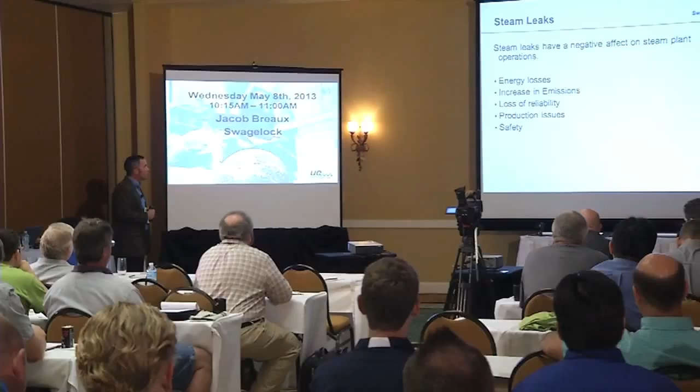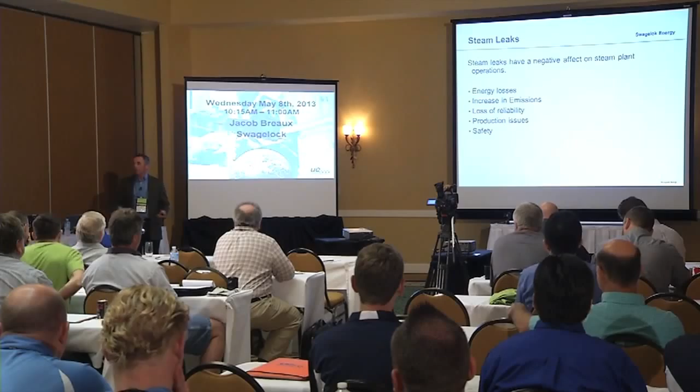They have a negative effect on the steam plant: energy losses, which is pretty obvious right? Steam is not free, you have to do something to create it. If you lose it, you're losing money. Increased emissions, you're having to use the boilers more, possibly even run another boiler. Loss of reliability, production issues. Leaks are a form of flow, pressure drop. You're losing pressure, you're losing temperature. So if you have tracing systems and you're losing temperature, that may be causing you production problems. And then obviously it's a safety issue, not only because it's hot and it can burn you, but during the wintertime it'll cause freezing problems.

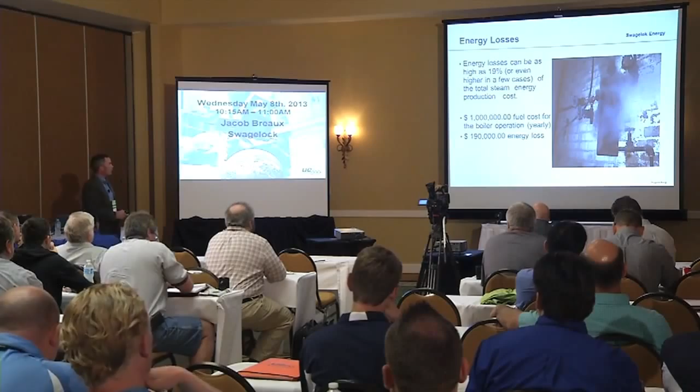The losses can be as high as 19%. So let's say, for instance, you've got a $1 million fuel budget, that's $190,000 potentially, and every plant's different. I want to make that clear from the start—I'm not giving you a fact about any plant, I'm giving you rough ideas of what we've seen throughout our work. You could be losing $190,000 just through leaks of various sorts. Leak correction has the biggest payback.

We get asked a lot of times to come into plants, do audits for various reasons, whether it be production issues, energy issues, water hammer issues, you name it. And we're always looking at potential payback and return on investment. So a lot of times we're looking at obvious things like insulation, possibly a high-pressure condensate return system, to improve thermal efficiency.

But without a doubt, leak correction has one of the greatest paybacks. A lot of time is spent, and to good measure, replacing steam traps, testing them. But if a steam trap fails and you have the proper condensate return system, you're losing the latent energy. You're not losing the total energy if you're recovering it. So although it may not get the attention that a lot of the other aspects of steam systems get, leaks themselves can save a whole lot of money, just as much, if not more, than some of these things.

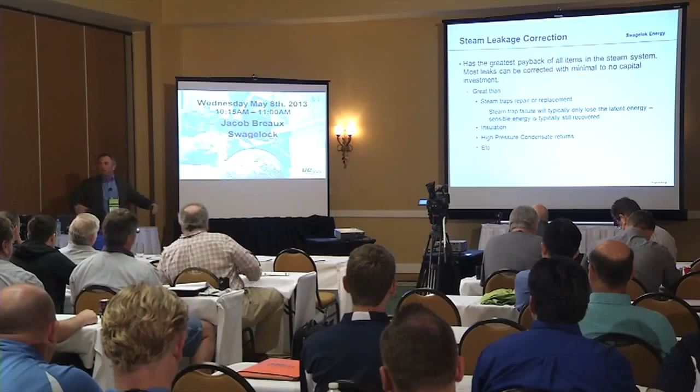We'll spend a lot of time on boiler operations and whatnot. But I'll tell you, you go out there and you're working on things, a high-pressure deaerator, whatever the case may be, and there's leaks everywhere, and you just wonder to question yourself, hey, this is obvious. Fix them.

We get into this because we do both. We work with steam, we work with compressed air. Kelly Paffel, who's the technical manager for SEA and my mentor and who I work with quite a bit—today he's actually beginning an audit, and I just learned from Adrian it was a compressed air audit. I thought it was steam. Nevertheless, a lot of interest gets paid to both of these.

Now, I'll say this—again, I'm from South Louisiana. I live in the heart of sugarcane country. There are 8 major sugarcane mills where I live. Their byproduct from sugarcane is bagasse. Their boilers burn bagasse, it's essentially free. So if someone from a sugar mill is sitting here today, they're going to argue this point and say, no, we're not paying $10 per 1,000 pounds. Our compressed air is actually costing more. Great, fine, whatever—it's still costing you money. It's a leak.

But in this case, the point we're making is that oftentimes we spend a lot of time on compressed air, not realizing the cost for steam. Right now, with today's natural gas prices, $10 per 1,000 pounds is probably a little high—it would definitely take into account loaded costs, fuel costs, boiler efficiencies, and all the water and chemicals and whatnot. But for the sake of discussion, we'll go with $10 per 1,000 pounds, 100 PSI. You're looking at about a $1,500 difference over the course of a year at the same pressure with the same leak.

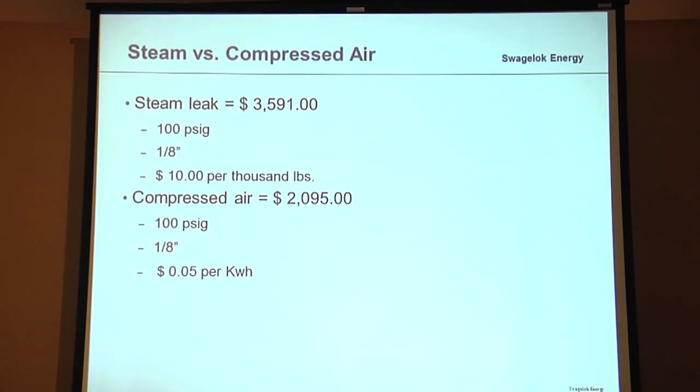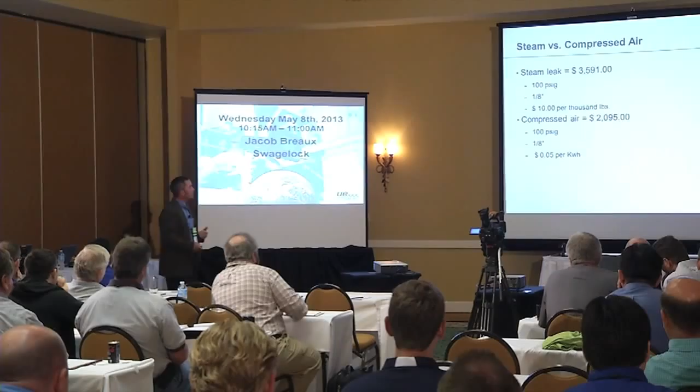And truthfully, in our business, most of our work is with steam. We do compressed air, but most of the work is with steam. So the question becomes, okay, we know it's not wanted, we know a leak is an undesired flow path—how much are we losing? How much is going through this leak?

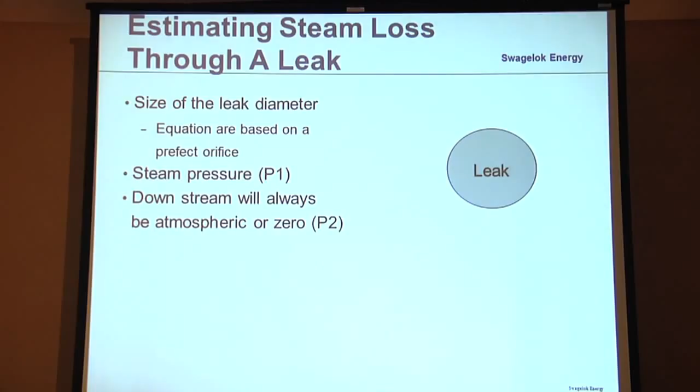Well, it depends on the size—here's the leak, so it's 1/8 of an inch, 3/16, 1/4 of an inch, whatever the case may be—and it's the steam pressure. The downstream pressure is always atmospheric, obviously, since it's leaking to atmosphere. So a leak calculation is no different than any other fluid flow calculation—it's due to pressure drop and orifice. The only constant in this case is that it's always atmospheric pressure.

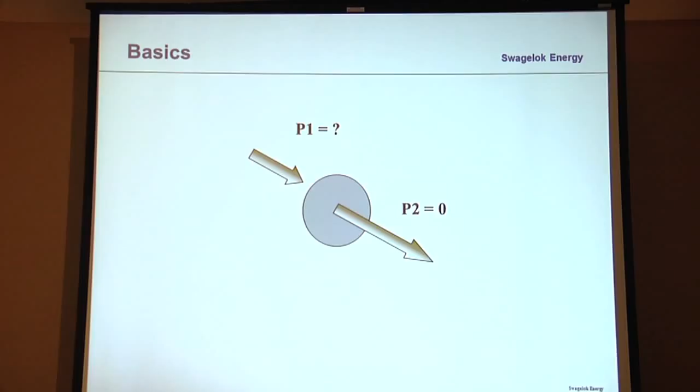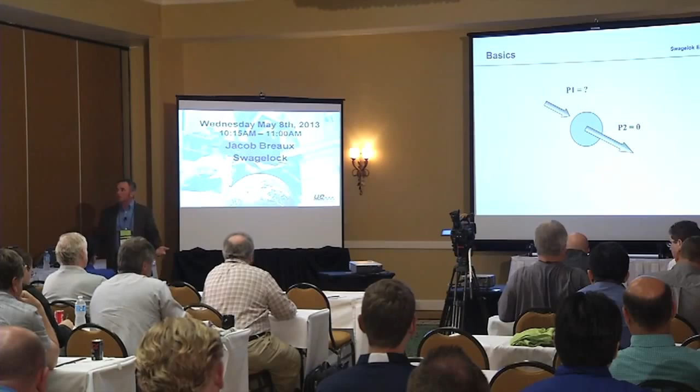So here's the basics: P1, P2. 50 pounds to 0, 150 pounds to 0. Which one's going to have the higher leak rate—150 to 0 or 50 to 0? 150 to 0. So a lot of these things I'm telling you are pretty elementary, but you fix the high pressure leaks first—that's where you're losing the most steam, that's where you're losing the most energy.

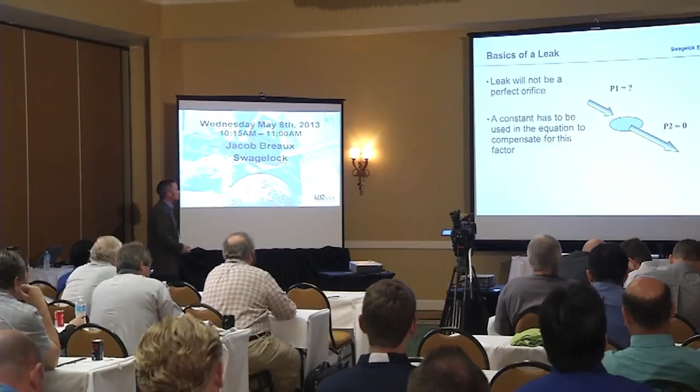However, if it was that easy, it'd be done probably more often. But a leak is not perfect—a leak is leaking around the threads of a connection.

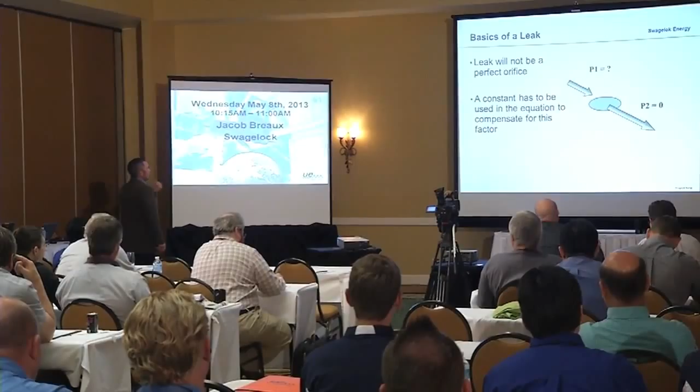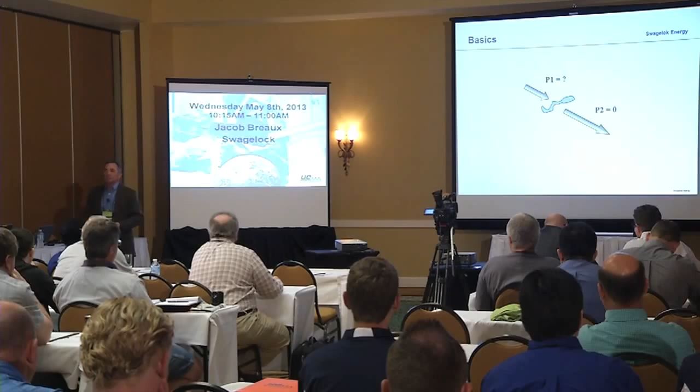A leak can come through the packing of a valve, or at a flange point. It's not a perfect circle you can run a perfect calculation on. So in order to try and understand it and better quantify the leak, a couple of constants have been developed, because leak points are going to be jagged, like a crack in a line. It's not going to be a perfectly symmetrical orifice.

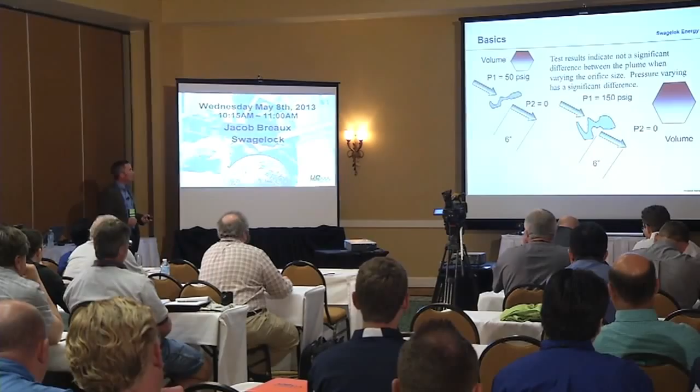Now, a lot of times we get into discussion about plumes and how long the plume is, and it'll tell you the length. Well, here's what I'd like to say: test results indicate there's not a significant difference in the plume when varying the orifice. However, varying the pressure has a significant difference.

So here you've got a smaller leak. This is just a representation of the orifice versus potential total volume. At 50 pounds to a zero orifice, the example I just gave you, maybe a 6 inch plume. And when I say 6 inches, I'm talking about to the end of where you can see any kind of velocity, and then the wind just starts wisping it away.

Well, you can have 150 pounds, but if you've got a larger orifice — and believe me, it's not that easy to look at because it looks like fog. A lot of times you feel like you're the opening band at a rock concert, because you're coming through this smoke screen when you're trying to look at this stuff. But the fact is, you don't know.

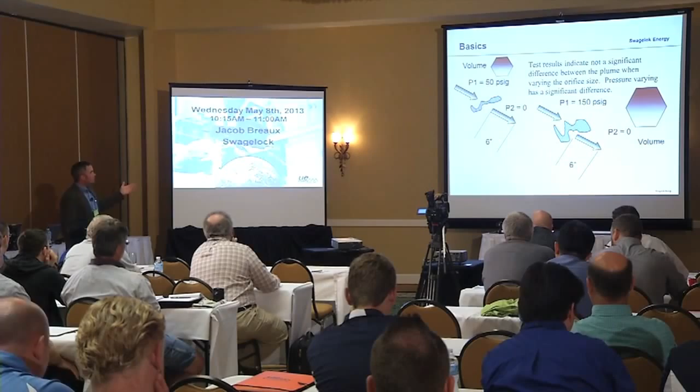So if the plume's 6 inches — let's say you can see some velocity coming out, and in order to have velocity you have to have pressure, so that's what's driving this. But it's 6 inches, and this one also looks to be 6 inches, and these are rough estimates. Well, you have no idea if it's the same volume just by looking at the plume. It's highly dependent on pressure, that's what I was just saying.

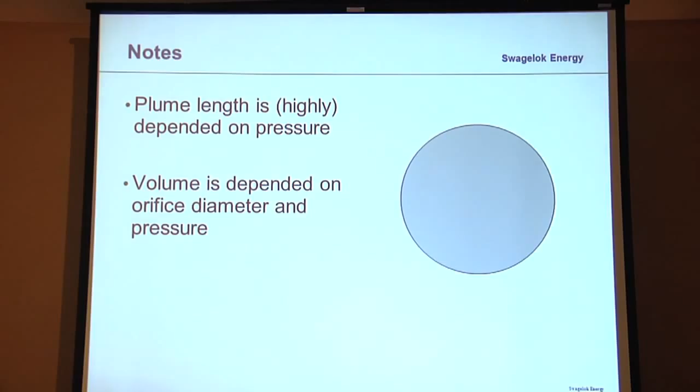The volume, however, is dependent upon the orifice. The actual loss is going to be dependent on how big it is. That only makes sense, right?

So if we look at this: at 250 pounds through a 1/8 inch leak, this carries through our $10 per 1,000 pounds that we established earlier — almost $8,300 a year on a 250 pound leak at 1/8 of an inch, and that's estimated. However, you go up 3 times in the leak size, you go up nearly 9 times in the cost.

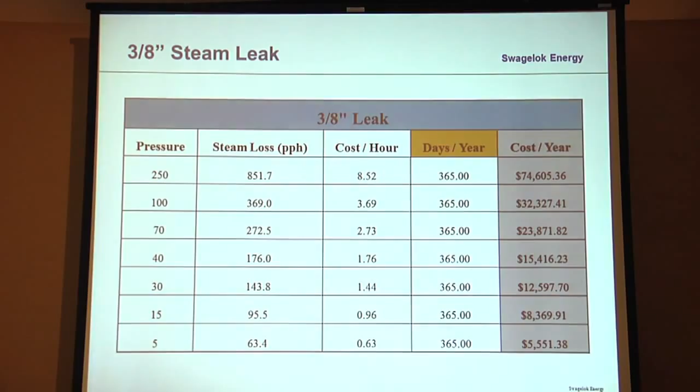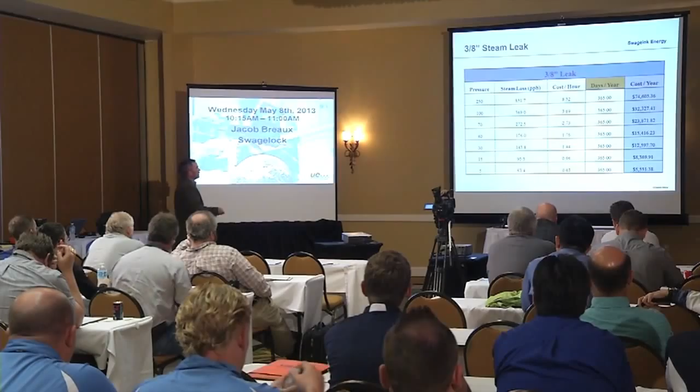We'll see soon why that is, and you probably already know — in any flow calculation, the diameter is squared. So when you start increasing that diameter, being a squared function, your cost per year and your actual volume go up 9 times, as in the case here. Going back and looking through it, it stays the same for most of these — same pressure, but 9 times the cost because of that leak size.

So what is the equation? It's a variation of Napier's equation. There are different variations, and this 22.88 is simply a constant that's been derived and accepted that we use — I've also seen this number as 23 or 23.5. The fact of the matter is, this is simply an estimate, a best guess, arrived at through testing.

This is the point I was making: the diameter is squared. Fix the big ones — that's what's costing you. It's pretty obvious, it's right there. It's math, it's not magic.

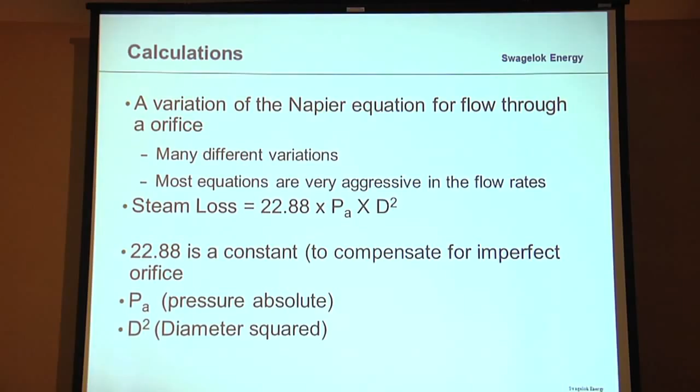So looking at a couple of examples, here we've got a distance — this is what I'm talking about when I say the plume length, 6 inches. You've got a 3/4 inch valve, maybe a third of the way open, so we're estimating now a 1/4 inch leak at a pressure of about 140 psi.

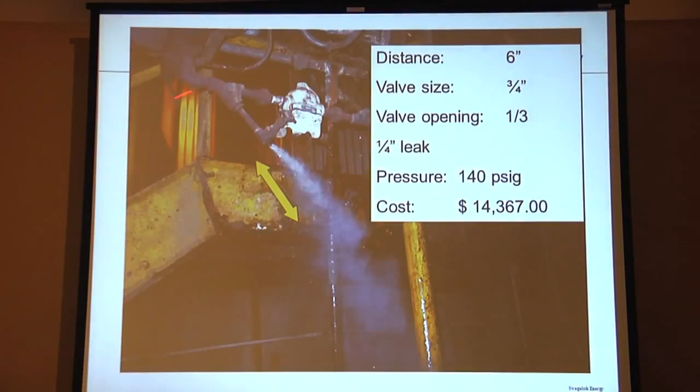What I want you to see in this picture is the valve's not leaking, the valve's open. Why is it open? More than likely they're having problems at the steam trap, so they're not getting condensate through, so they're opening this to drain the condensate so they can maintain temperature.

A lot of leaks - I see one guy shaking his head, I've hit with that before. How often? I need to start selling hoses, because most of the time there's a hose from here to the nearest drain. That's the reality - that's another subject, that's part of our STEAM classes.

But just to talk about it a little, what I hope you get from this is when you walk by this, put a number to it: $15,000. So not only are you losing energy, you're creating a safety hazard, you're having to produce more steam. Everything I said at the beginning of the presentation holds true in this one simple application.

Any questions or comments - I don't want this to be death by PowerPoint. Please stop me at any point and ask a question, I don't mind at all. And if I get off a little on other subjects of STEAM, just get me back in line, but I like to tell you a little as I go, because I see it all the time.

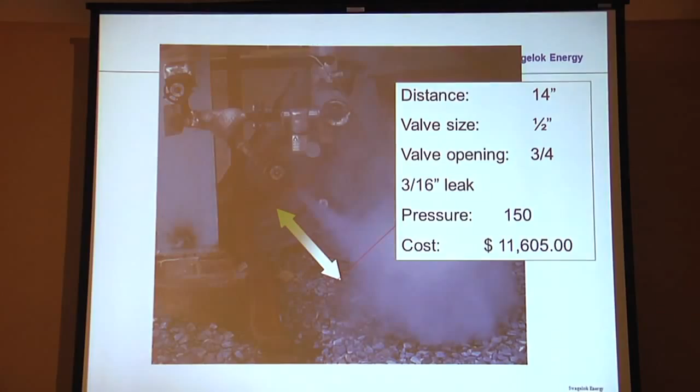Again here, I know I should have put some on the same screen, but with a 1/4 inch leak, 3/16 - now we've dropped down a little bit. We've actually increased the pressure, but again because of that diameter being a little smaller, just understanding costs - this, you've got 250 pounds, same leakage, same leak estimate.

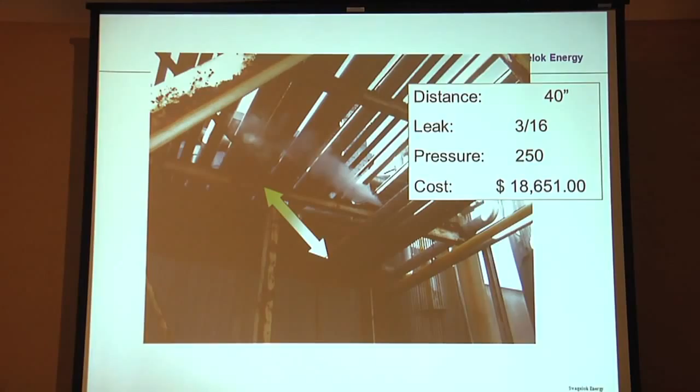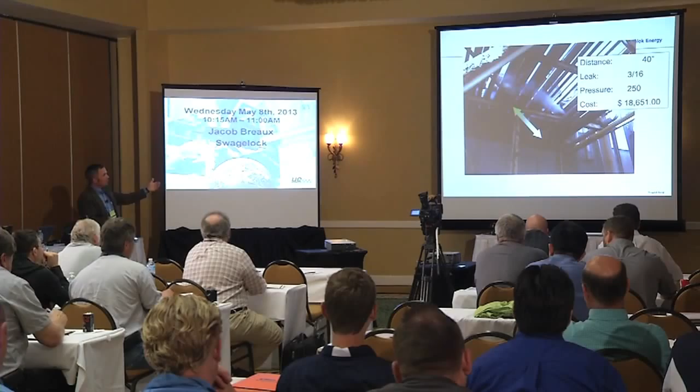Now, these are all estimates, and that's what I'm getting back to - your cost is going to go up. Higher pressure, same diameter, you go up 100 pounds, you're increasing your cost by almost $7,000 a year from a leak standpoint. Now here's a question for you.

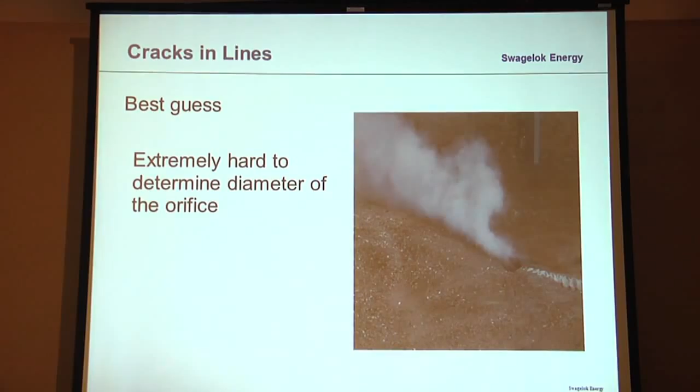So we've got the equations, we understand the equations, we can do it. We walk by and we see this. Now, anyone want to take a guess what that leak rate is? You have no idea - it's on the ground. There's no way you can quantify this.

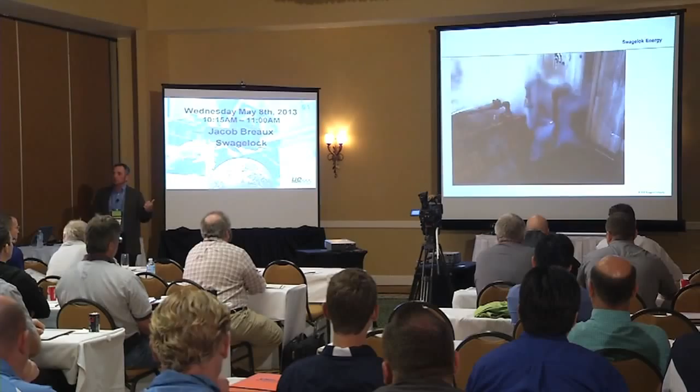What do you think the plume length is here? Any idea? The hose is here.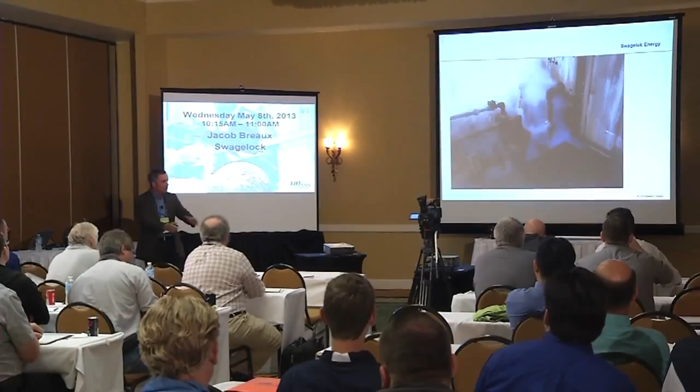I want to go back to this one and stop it here for a second - I'll touch on a lot of these things throughout the presentation. But one of the things we're big on, especially with condensate systems, off of drip pockets, off of small loads - you can't do this off of process heat exchangers, but we typically tend to stay and use more tubing, tube fittings, stainless steel.

Why is that? Because when people are designing condensate systems, they'll use Schedule 80 piping. You know why? It buys them a little more time before the carbonic acid eats through it. It's not for pressure, it's for a little more longevity in that piping system. And then what do they do? They thread it. And guess what happens when you start up and shut down steam systems and condensate systems - they expand and contract. And where is the expansion and contraction going to take place? At the threads, which is now the weakest point.

So you've bought a big old thick pipe, but then you've threaded it, and you've made it where you've left no room for expansion in a system that is going to start up, shut down, and expand and contract. Guess where your leaks are going to be? At the threads.

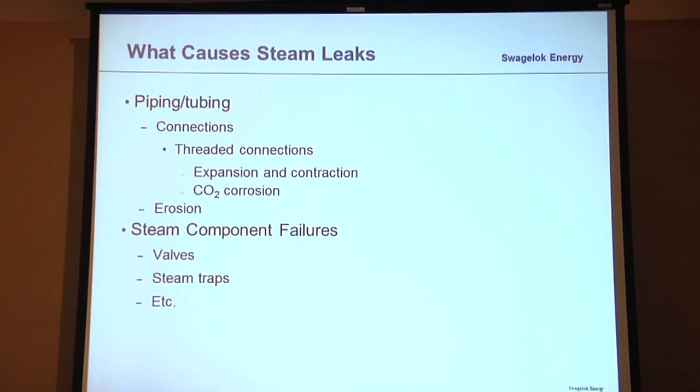These are just more and more videos, but I want to get to some of the presentation here. So, connections - I just talked about that. Expansion and contraction, erosion, valves - you know, this is classic. So people buy valves that leak. Did you know that? How many buy valves that leak?

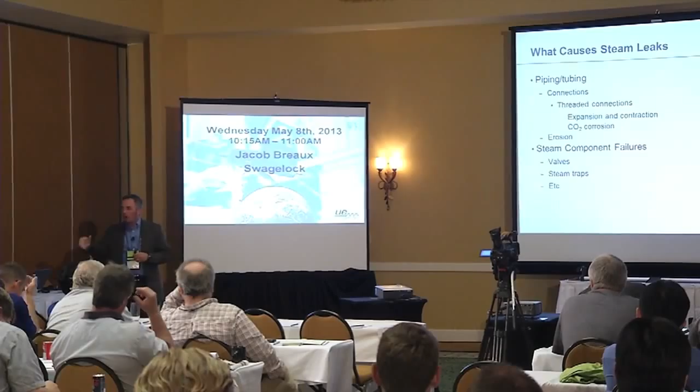Come on, here's the deal. When you woke up this morning and brushed your teeth, you were operating a higher shut-off class valve than most people buy for steam systems.

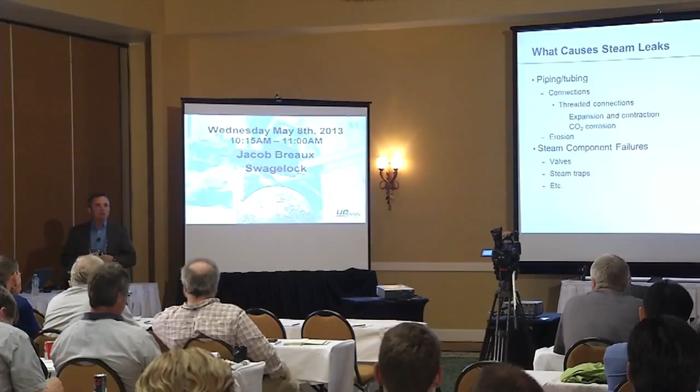If you're buying less than a class 4 shut-off, it's going to leak. You install it, it leaks. So what happens? You get somebody out there with a 36-inch pipe wrench and a 4-foot piece of conduit, known as a cheater, and you get on it and mash it, metal to metal. The best you can hope for is that it starts leaking. The worst thing that can happen is you break the bonnet and you've got a nanosecond to get out of there. It's done all the time.

There's higher quality valves in hotel bathrooms than there are in steam systems. Yet we wonder why we sit through presentations about leakage. It's right there in front of you. There are quality valves. Do they cost more? Absolutely, no doubt, up front. But longer term, if you believe some of these numbers and look at these leak rates and the potential savings, I'd argue it's a better payoff.

Steam traps. Now I have to be careful, there may be steam trap people in here, but I'd say no matter who makes the steam trap, no matter what design - float and thermostatic, mechanical, thermodynamic - they leak. Why? Because one of the functions of steam traps is venting air, very poorly I might add, but they vent air at startup. Well, in order for them to vent air, they have to lose a little bit of steam. That's a fact.

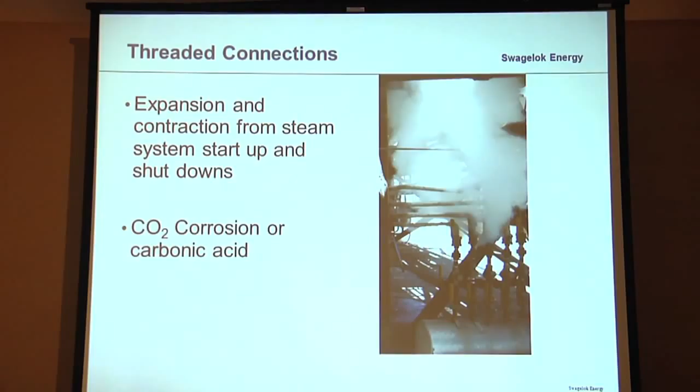Expansion and contraction from steam, carbonic acid - why is this a big deal? Everyone runs steam systems. I don't know of a case where you've got deaerators that do a perfect job. They do a pretty good job of venting non-condensables, but it's not perfect. Things condense, CO2 forms carbonic acid, and it will eat away at carbon steel.

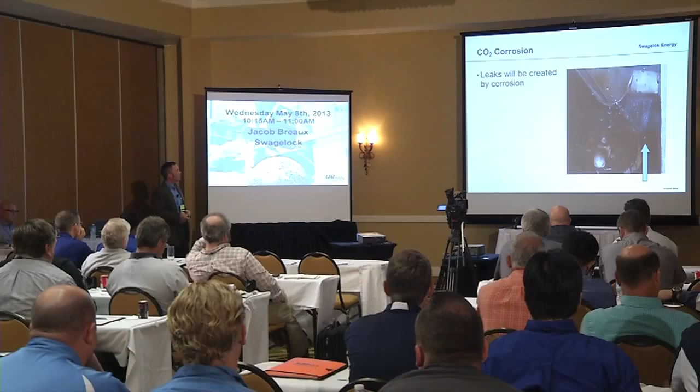Going back to the condensate systems and why we're a proponent - I think there's some inherent benefits to using stainless steel over carbon steel for condensate systems. And leaks will be created there. Here's the deal: a small leak today, a bigger leak tomorrow.

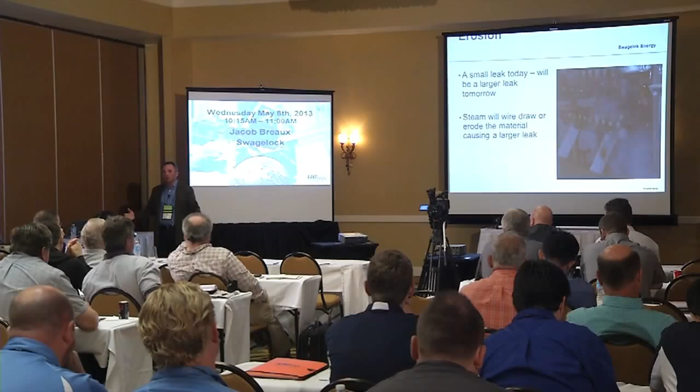The valve I just told you about - so now you mashed it, it's closed, you did your job. Now you've got to open it. A lot of times people open valves without warm-up valves, so they're taking a valve that big and trying to just barely open it. Well guess what? When it barely opens and you create that pressure drop, it'll cut it like that.

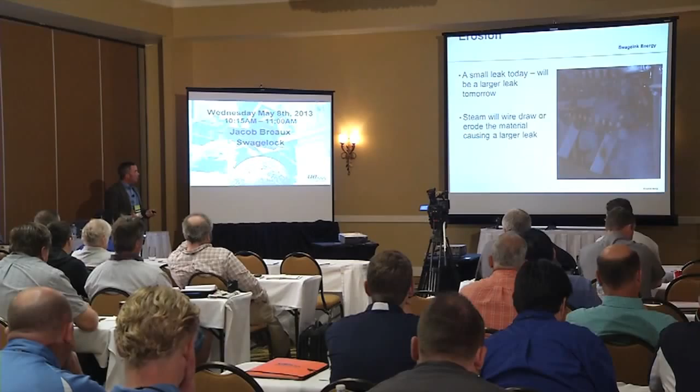It'll wire draw over time, and your small leak, your 1/8 of an inch, becomes 3/16, becomes a quarter, and now it's really costing you a lot of money.

Let's talk a little bit about emissions. If you're losing this steam and you need this steam, you're having to make up for it. We all know about emissions, we all know about the emphasis on it right now. This is fossil fuel emissions, pounds per billion BTU of energy input.

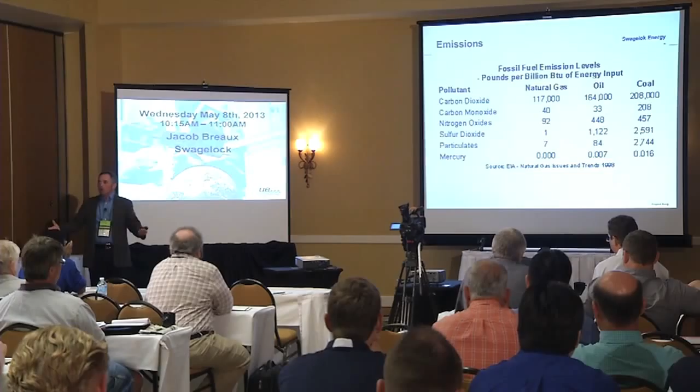As I said earlier, there are multiple fuels being used for steam production within boilers - I've just put a couple of them up here. But these are the type of numbers that matter. Hey, you've got 2 boilers running, let's say one at 60, one at 40, whatever it is to maintain it. Is there a potential to turn one off? And man, nobody likes that. Well, why do you have 2 boilers running? One can do it. Well, just in case.

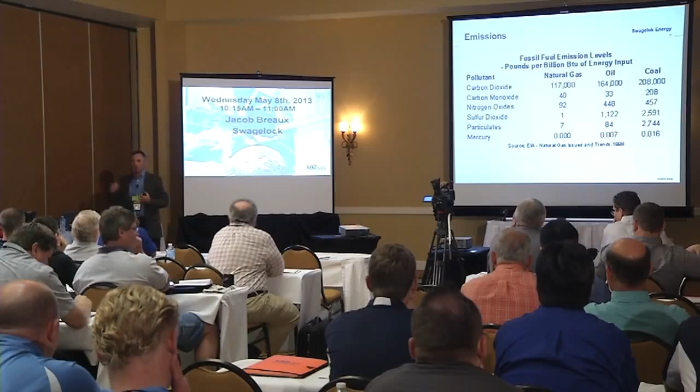Just in case. So you're running it at less than 40% firing rate, which means the excess air is great but the efficiencies are horrible. You're costing yourselves emissions, and you're producing steam you really don't need, but don't worry about it because you're leaking, so you're losing it. So when I fly back to New Orleans tonight, how many cars do I have in the parking lot? One. I don't have another car just in case. I mean, really.

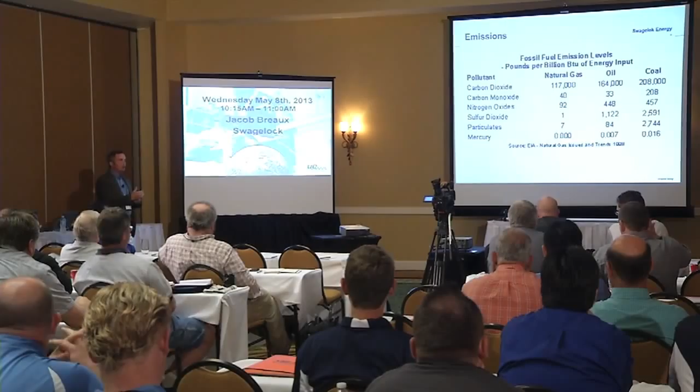So the point is, do the maintenance, do the PMs, have a boiler management system, try to look at ways to reduce leaks. I guess my point is, and I learned this from Kelly, his favorite word is: don't componentize. People love to componentize systems.

Oh, it's a steam trap. Well, no, it's not a steam trap. You're trying to elevate condensate 30 feet, and you're losing differential across the trap. It's backing up condensate into the heat exchanger, and that's what's causing the water hammer. Anyone ever tell you their trap handles water hammer better than anyone else's? Just see them out, wish them a good day, that's a ridiculous statement. Water hammer kills people. It's not the trap's problem, it's a piping problem. The picture I showed you with the leak, it's probably not the trap's fault, it's probably a piping problem.

Then this is my favorite. They come out the steam trap, and as soon as they come out, they reduce the piping size. Why would you do that? Condensate is 2-phase. They size condensate lines based on liquids, but condensate is a 2-phase flow. So as soon as that condensate comes out and sees a pressure differential, a percentage of it is going to change state and re-vaporize. It's going to expand, but yet people reduce the pipe.

These are just tidbits of things that you need to be aware of and look at and think about, why are we doing this? Okay, back to leaks.

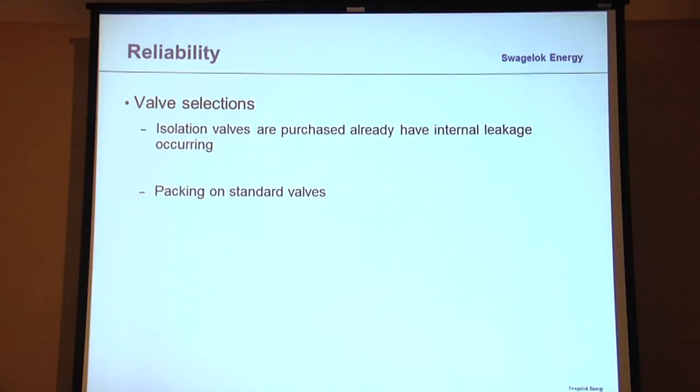Valve selections, I've already kind of touched on this. Isolation valves as purchased already have an internal leak rate. Someone can tell you, my valve doesn't have to meet a leak rate. They are 100% absolutely correct. If it's a class 1 valve, you don't have to meet it. It's up to us as consumers, engineers and project managers to specify a valve with a leak rate.

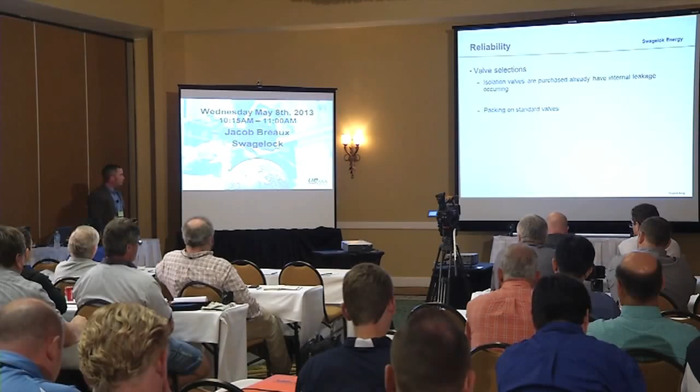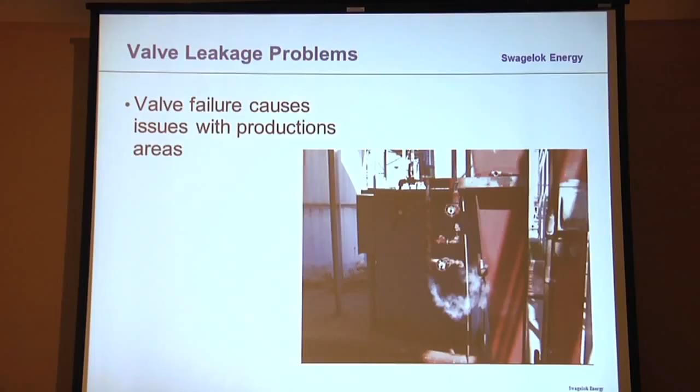Why am I showing you this picture? I don't know why I don't want to. I apologize, I wanted it to stop on that picture.

A lot of times we'll start talking about steam quality. People ask us about steam quality, and there's a lot of different ways you can test steam quality - laboratory type tests to get official. But a good rule of thumb is, open a valve, and steam is invisible. Steam is not that white puffy cloud that you see - steam is an invisible gas. So when you open a valve, if you've got good steam quality, there should be about 2 inches that you see nothing. It's absolutely invisible.

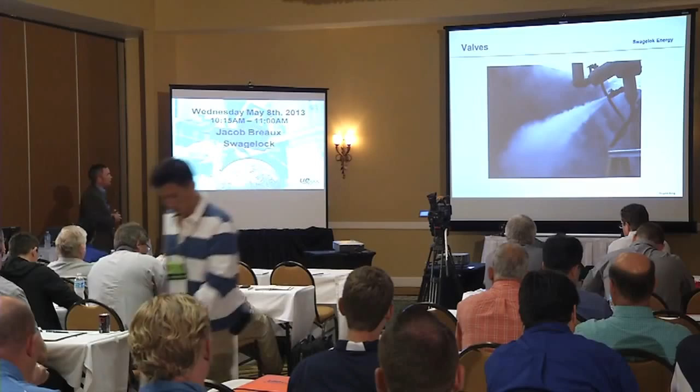So my question to you, what do you think of that steam quality? Very poor. But the reason I bring this picture up is because during an audit, during a needs assessment within a facility, we'll be walking around and we've been told, hey, we've got poor steam quality, yada yada. So we'll ask someone, can we open a valve? Well, that requires a work order, it takes a while, but the point of the story is they don't want to do it. And we're like, well, we want to just get a look at it. Why? Because they're afraid once they open it, when they close it, it's still going to look the same exact way.

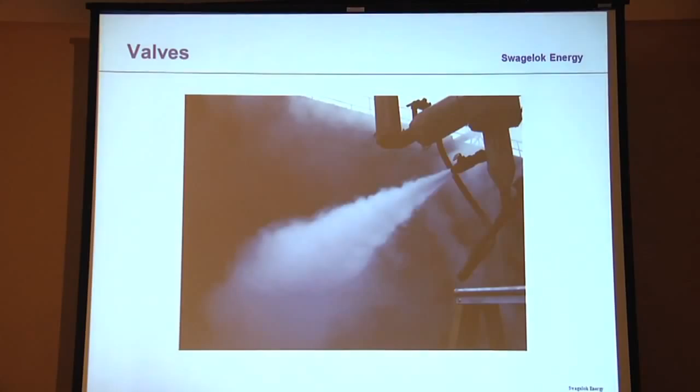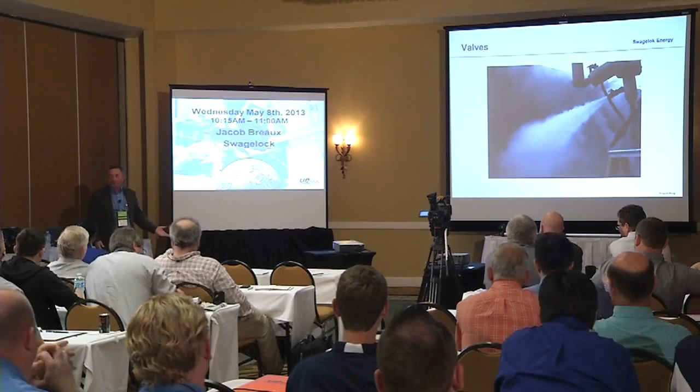Just what you see. I mean, this is real life, this is what happened. They're hesitant to open a valve, not knowing that when they close it, it's going to shut off.

This is what I was talking about earlier. So if you remember back to my opening slide, I talked about energy losses, I talked about emissions, I talked about production issues, I talked about safety issues. And one of the things here with production, it'll lower pressures.

Steam tables - for a given pressure, there's a given temperature. 100 psi steam is 339 degrees. 99 psi steam is something less than 339 degrees. So if you have a system that is designed for a given temperature, i.e. pressure, and you no longer have that pressure because you can't maintain it due to leaks, then you no longer have the temperature that system was designed to. So when I talk about production issues, that's what I'm talking about - a drop in pressure is a drop in temperature.

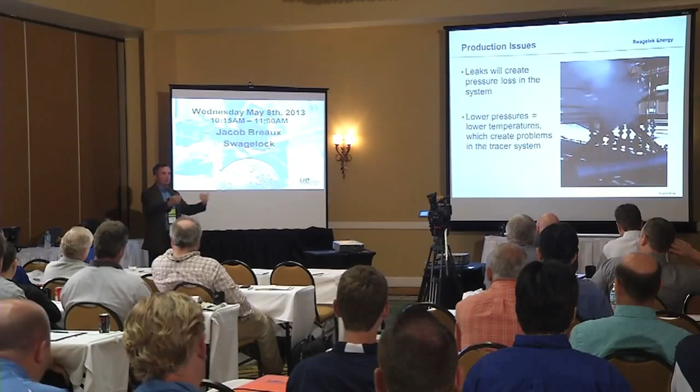If a process needed a certain temperature, you no longer have that. And then safety - these are pretty obvious.

Personnel injury, burns. Fortunately, I haven't been involved in an incident investigation myself. Some of our other engineers have, but I have been involved in training for folks who had an incident, and part of the follow-up was they needed training. So we did the training, and I'll tell you, it's not very fun, and it is very, very real.

So burns are obvious. Fog conditions - if you think back to that video I showed you with the two big steam traps and there was just a fog everywhere, that's dangerous. I've been in situations where I couldn't see someone from me to the table because of the fog coming up. Those are dangerous situations.

And this is the deal - Kelly said this first, and it's so true. If I go into a plant and I have to get on a ladder higher than 6 feet, I need a harness, I need to go through training, I need to do all these things, but yet I can walk by and they got 100 psi steam leaking, blowing out the pipe. For me, it's hard to fathom. I'd rather take my chances on a ladder than walking by 100 psi steam blowing out. It's up to you, it's your choice, but I know what I would rather do. I'm much more comfortable on a ladder.

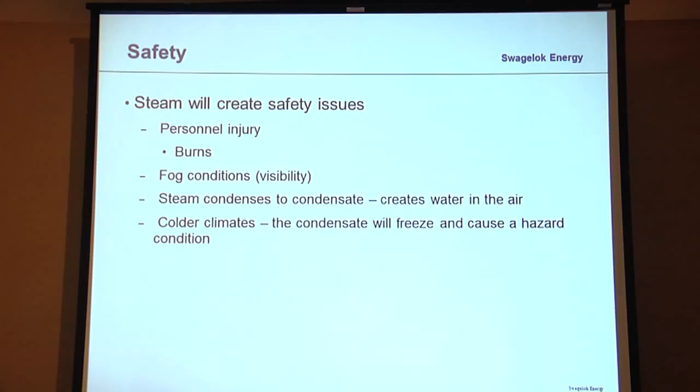Obviously, steam condenses, forms condensate, and then maybe not in Tampa, maybe not in South Louisiana too much, but in the colder climates, it'll freeze, and that becomes a hazard.

So what can we do? What is the message here about leaks? Leaks to me is just an unwanted flow path, that's how I describe them. If anyone has an example of a good leak, please let me know, and I'll use it the next time I do this. But I can't really think of any application where they're a good thing.

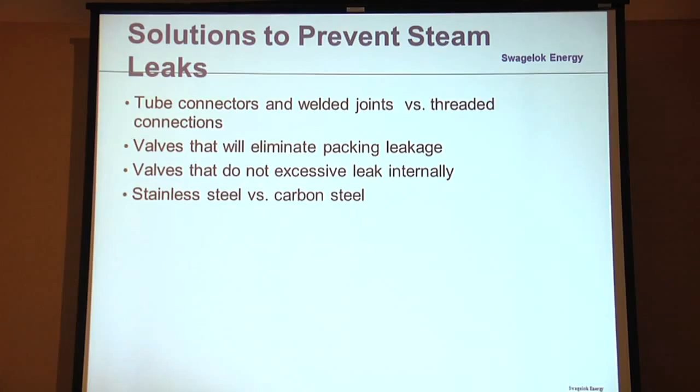Buy the right valves - valves with the right packing, valves that don't leak internally. That's a good starting point. Condensate systems, stainless steel, for no other reason than you're going to have carbonic acid. The best deaerators, the best chemicals in the world, you're still going to have some carbonic acid.

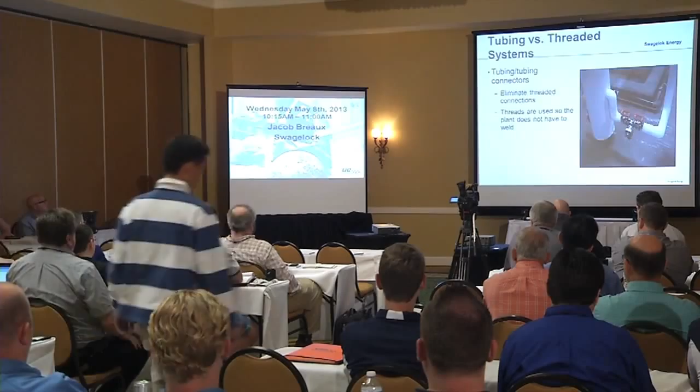Here you can use tube connectors, eliminate the threads. This is available on our website, Swagelok Energy Advisors. We've got 33 best practices - they're free, there's no charge to them. They talk about best practices and they talk about standard connections. I'll just give you an example here.

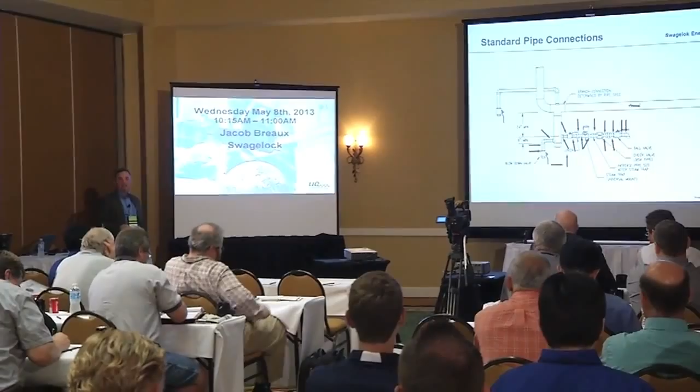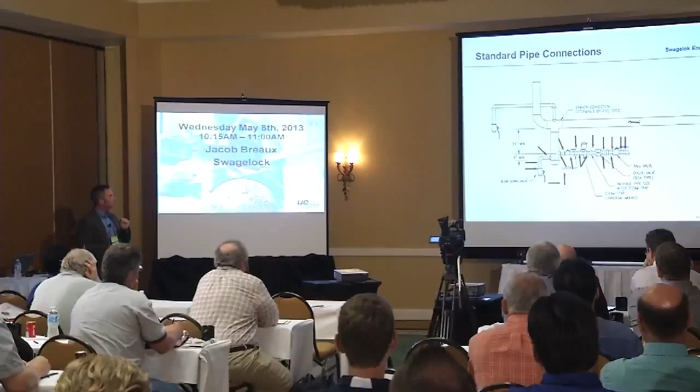We have best practices on that, as far as diameter versus drip pocket. This is not, don't get me wrong, a bad design - this is done properly - but at each arrow, there's a connection, a threaded connection. One thing while I'm on this, I'll make a note.

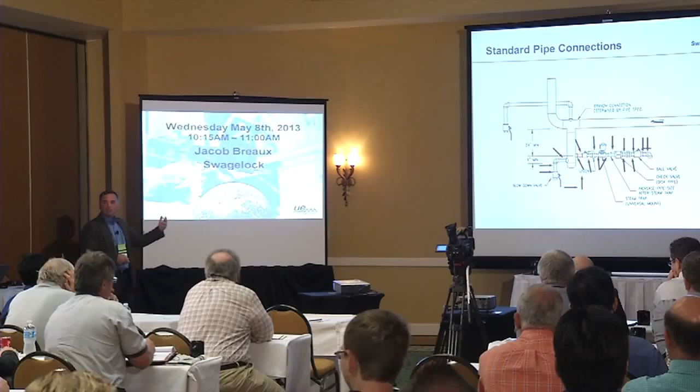When you see this here, this is actually done correctly the way we would recommend doing it. Don't put the blowdown valve right here, because all your trash is going to fall here - or I should say, I've been corrected, your corrosion products are going to accumulate here. And when you open the valve, it's going to come through and cut the seat, and that, my friend, is going to be one of those valves that don't close.

So come up a little bit, maybe 3 inches, maybe 6 inches, and that way you're not getting this corrosion product out the valve. So again, just a little tidbit of information.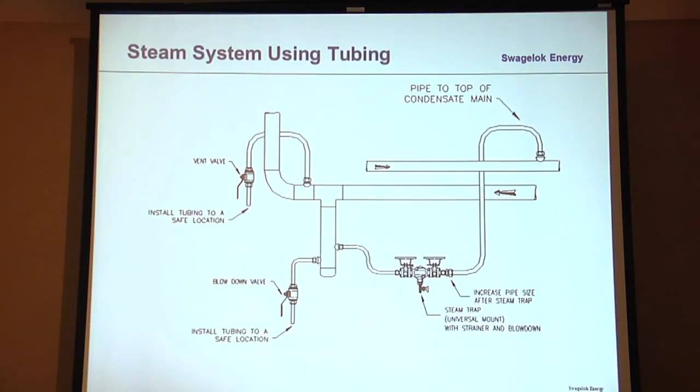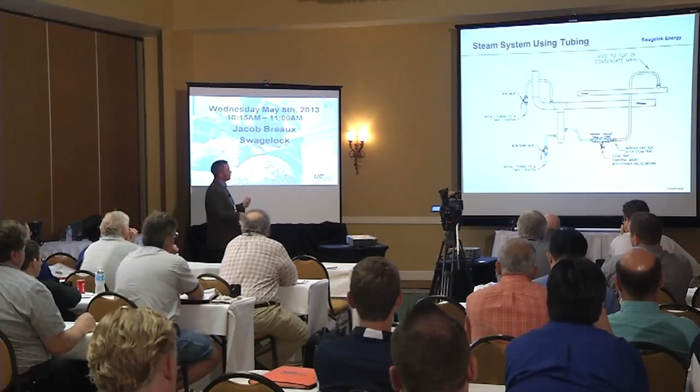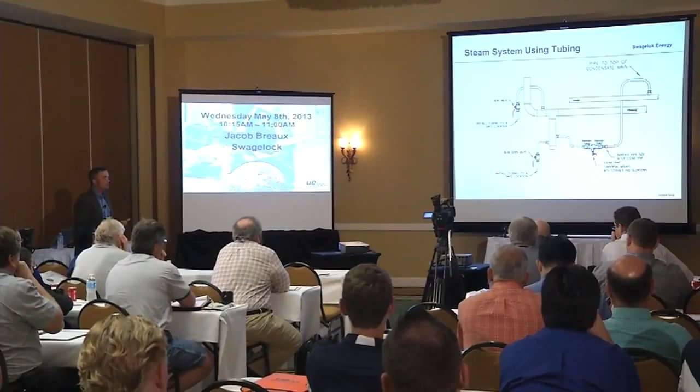But what I want you to do is compare that to using a tubing system for this. There's 1, 2, 3, 4 connections, and inherently it's stainless steel. Or if you do use carbon steel, you still get some of the benefits, but if you use stainless steel, you can fight the corrosion. You'll see here, these bends will inherently take up the expansion and contraction, and that's to me as much important as the stainless steel. So everything else is done the same - if you were to look at this from a P&ID standpoint, as far as isolation, drain traps, drain valves, it's the same.

The point is, we can no longer accept steam losses to atmosphere. There's really no reason. There's a lot of things you can do. Pressurized condensate systems, you can use thermal compressors. If not, you can use vent condensers, heat up water, do something.

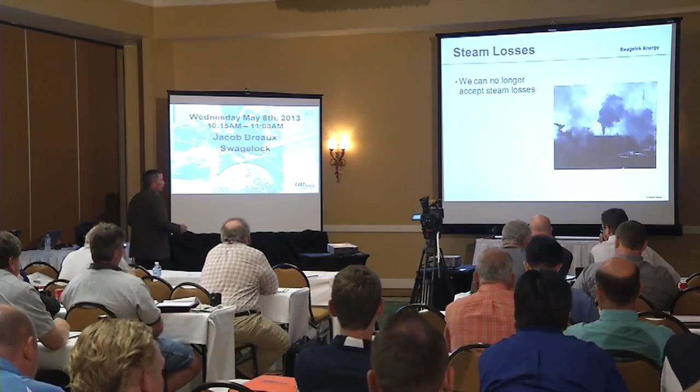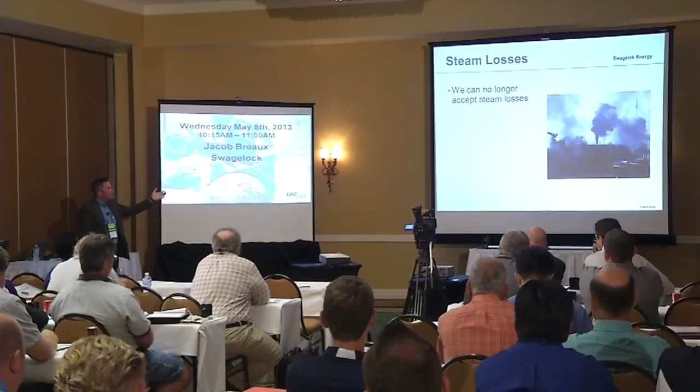When you drive by and you see this, that's a problem. We all know it's a problem, right? It's what I talked about a while ago. It's people not understanding that they have a condensate tank that, because it's being pressurized, because steam traps are blowing into the condensate system, the pressure in the condensate pot is rising, the pump is losing suction head, it starts to cavitate, so now you start backing up condensate into the heat exchangers, then you're generating water hammer.

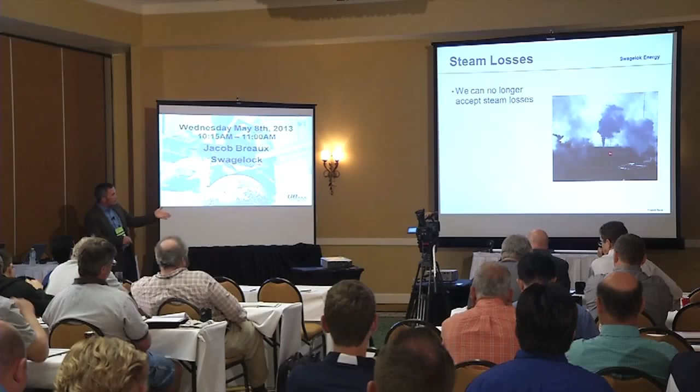I can promise you this, how I know the pressure is increasing in the condensate tank? Because of the velocity. You're not going to have this type of plume if you don't have velocity coming out of the condensate tank. So we can't accept it. This is what it should look like. This is what it can look like.

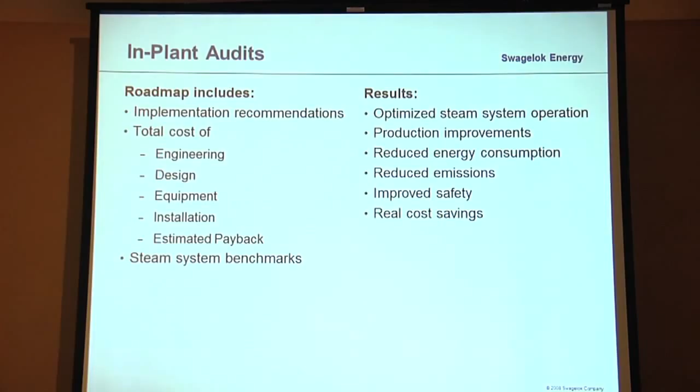So this is what I really want. Why do audits, why do audits on your own, not just us? Over 25% of steam generated is wasted. Again, these are just industry numbers, not our numbers. 20% of steam applications can be satisfied with lower pressure.

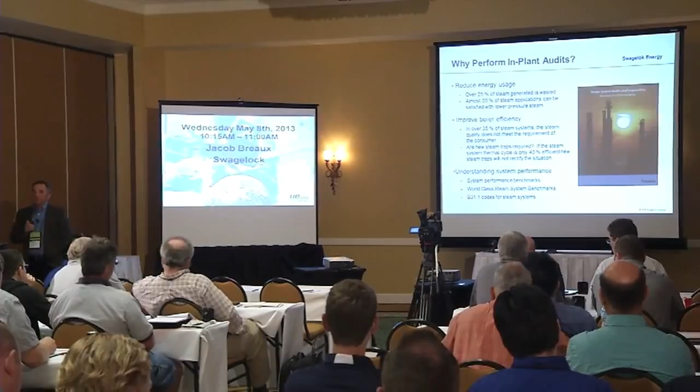What has more usable energy, 4 psi steam or 100 psi steam? 4 psi steam has more usable energy. You ask customers, what's your boiler? This is the first question. What's your boiler output? 250 psi. Why?

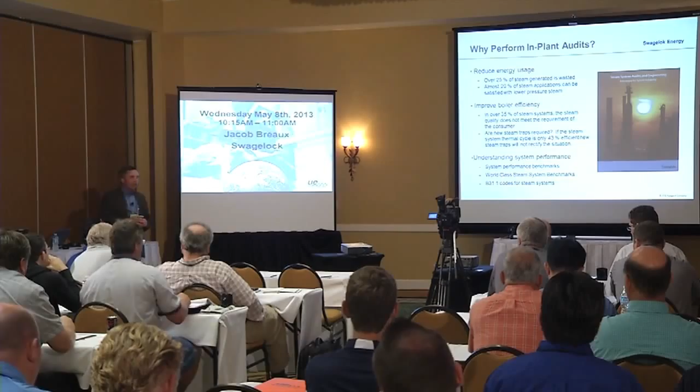That's what it is. Now, please don't go run and reduce your boiler pressures because they're designed for a certain thing. But my point is, if we would have stepped through the calculation for the cost of steam, so I gave you that number, I said it was $10 per 1,000 pounds. If we actually step through the equation, you will see a direct correlation between steam pressure and steam cost. The higher the pressure, the higher the cost. All things being equal, higher pressure steam. So just simply do an evaluation.

Now, we've done some work with particle boards and board manufacturers. There are glues in there that require a specific temperature to make it set up. Well, fine, then you need 230 psi steam because you need the temperature. So it's a matter of what do you need the high pressure for. If you need an exact temperature, fine. But if not, just reconsider and say, hey, are there ways that I can lower my steam pressure and essentially reduce my costs?

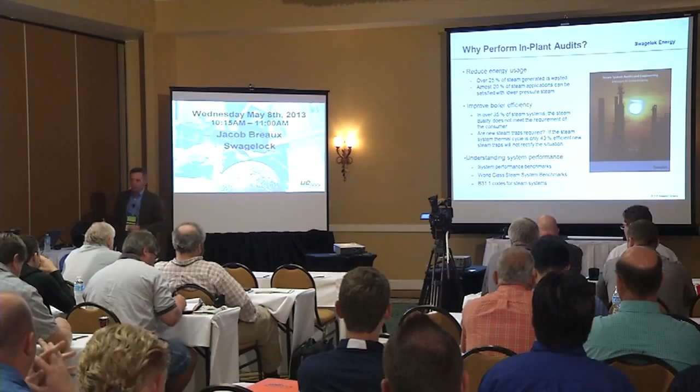Boiler efficiencies, are new steam traps required? These are the kind of things we talk about, because here, if the thermal cycle is only 43% efficient, we can go out and change traps, put insulation, do a lot of different things, but it's not going to have that much effect on it.

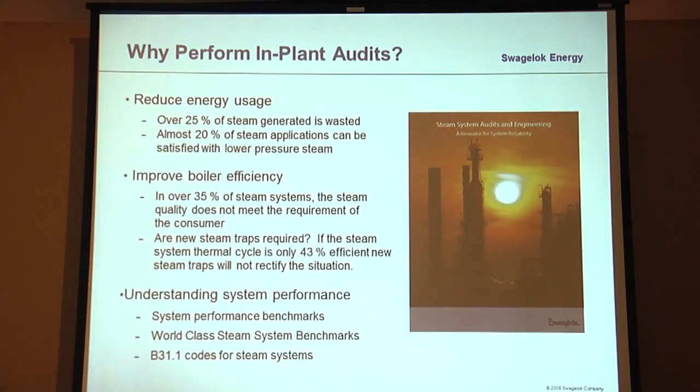And then understanding performances, everything we do per the codes, B31.1 if we're over 15 PSI. And that's really all I had to talk about this morning. Good job.